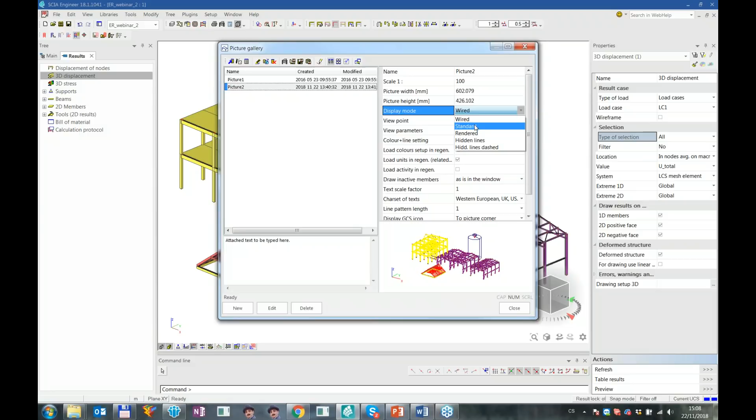I can also have different options of how difficult or how rendered I want to see my images. The easiest is wired, which is a simplified version, but I can also switch to rendered, and I have an overall rendered image. I can change viewpoints or any further view parameters that I am able to alter right in the 3D scene as well.

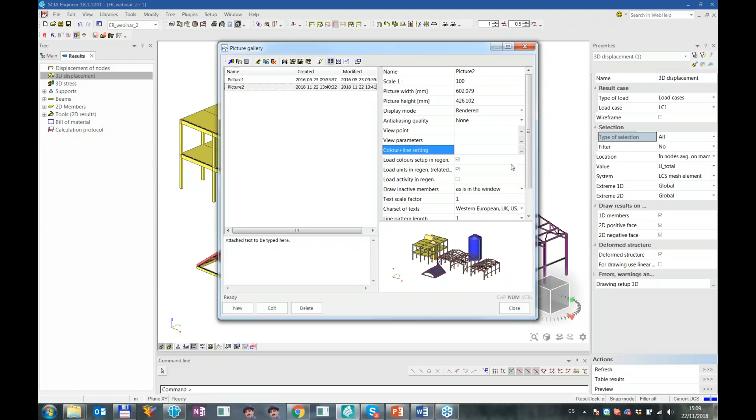And also I can change color and line settings for the entities displayed in the image separately for every picture, so not every picture has to go by the overall settings for the SCIA Engineer GUI.

I will demonstrate quickly how to work and how to be able to save pictures in files. There are multiple available types. For further notice, it's worth looking at 3D PDFs.

As mentioned before, not only 2D bitmap pages or images are available, but also support for 3D DXF and DWG format, and also some internal 3D format, which can be imported back to the engineering report. From an entirely different project, you can also import 3D vector images. I will show you how this works later on.

Here I can just write a random name and save it, and I will have the image stored in my folder. So I have it right here. I don't need this particular image, so I will delete it right now. So this is for the images. In general, you can use this on your own and try it out.

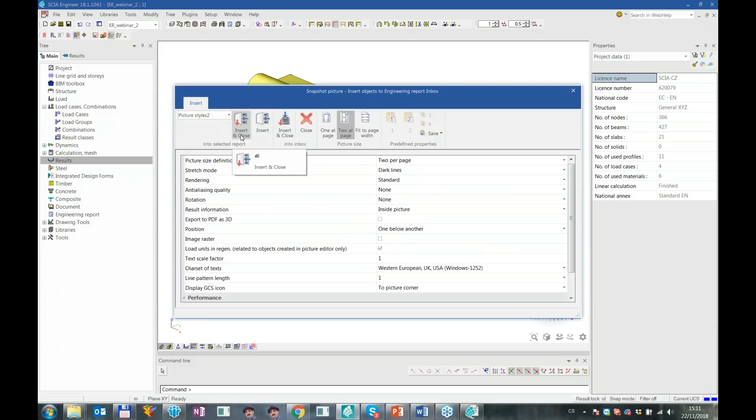If I click on the snapshot, I can again set a number of properties, and I can send this picture into the selected engineering report. I will send it to the last one because that's the one I just created. I'll do the same thing for the live picture in scale into the engineering report.

And of course, the third option, which is the live picture. I will now go to the engineering report itself to show you the properties of these pictures.

The first picture, which is just a snapshot, is and will always be a valid item. I can, for example, delete a structure here, and this is only the snapshot of a structure or even results as they were at the precise time the image was inserted into the engineering report, meaning no further changes to the report will be available in this picture. The only thing you can do with it is, since it is indeed a vector 3D image, play with the view. You can zoom in or out, and the image will behave correspondingly. So this is the behavior of the snapshot picture.

As default, I would not recommend using this one, because I believe most commonly you want to see the images change when the model is changed, by, let's say, deleting or recalculating the project.

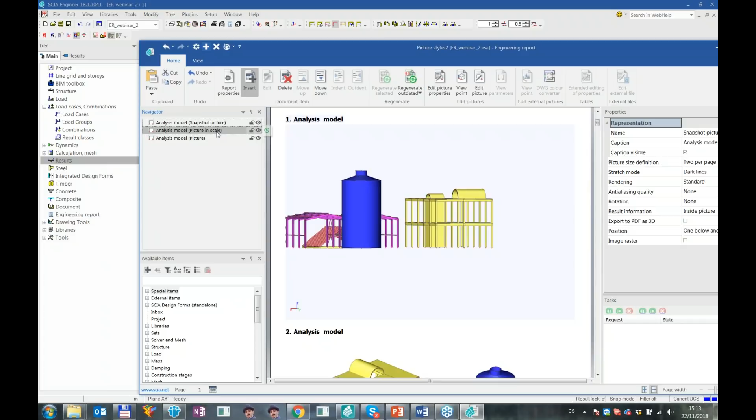The second type is picture in scale, and default live picture. These are images that have a wide range of possibilities for alteration. First, of course, it's the same for all three types: by double-clicking, you can change the view and hit OK, and the view of the image will be changed. You have further options.

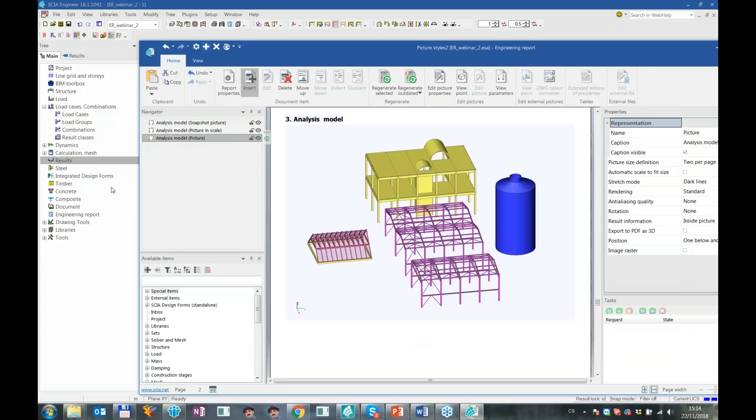Here, by the editor of picture, you can change view parameters, also viewpoint as demonstrated before, and in case this is the result picture, you can also change the type of results being displayed or the value that you display.

Let me quickly demonstrate such possibilities. Let me make here, for named selection, a 3D displacement drawing, or a different way, I can make current selection here. I can see that only for a few entities it was changed. I can insert this image into the engineering report.

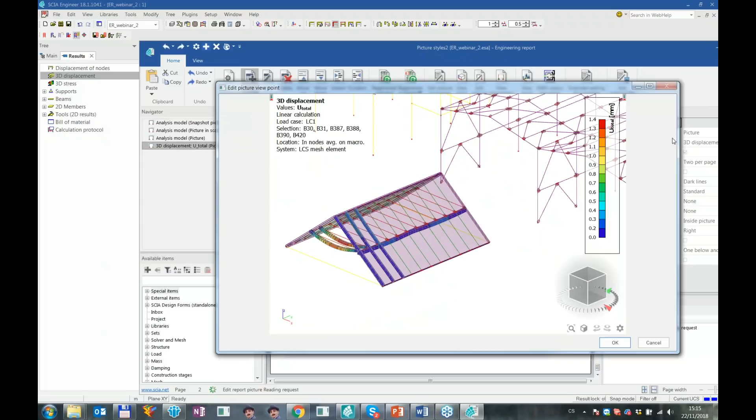And here in the editor, if I go to edit picture properties, I also can change the results here. For example, from current selection, I can go to named selection, and the picture will regenerate itself with the changed setting. The same would apply for the picture in scale.

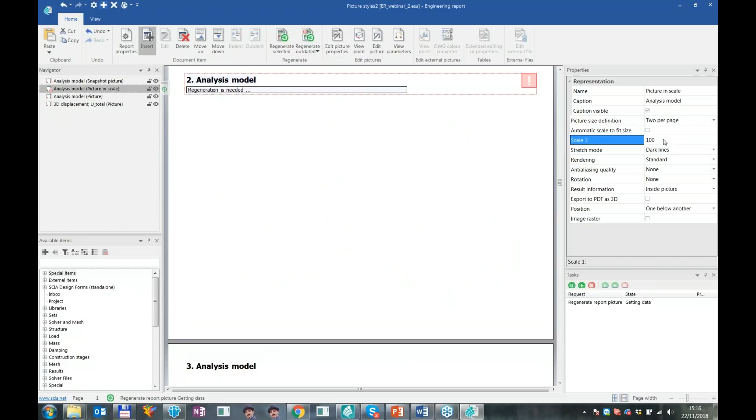The only difference here is that we have the scale factor, which behaves differently, because this would actually allow basically zooming in the picture. So by changing the scale from, let's say, 300 to 100, I get 3 times the zoom. In this case, this is also available.

This is not available directly, but I can make the exact same view, if wanted, by simply navigating in the 3D scene of the picture. So these are 3 types of pictures.

For the most common use, I would say that the live picture in engineering report is the one that you should use in order to have up-to-date and dynamically updated results in your engineering report.

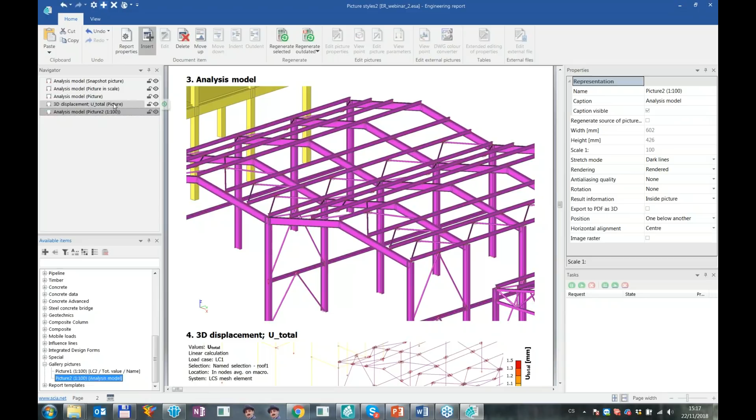I mentioned that there are 4 or 5 types of pictures, and the other one is that we are able to insert pictures stored in the gallery. In this ESA file, I have 2 pictures in the gallery, and I can insert them here as well. What you can notice is that these pictures will be inserted at their set size, as set in the picture gallery, and they will not be stretched to the size of the page. This is why I would rarely recommend using this one. Yet the possibility is here, and if you have the image size corresponding to what you want to see in the picture gallery, you can use this tool as well.

So this is for internal images in the engineering report, and I will continue with external images and using the automatic result generator in the engineering report.

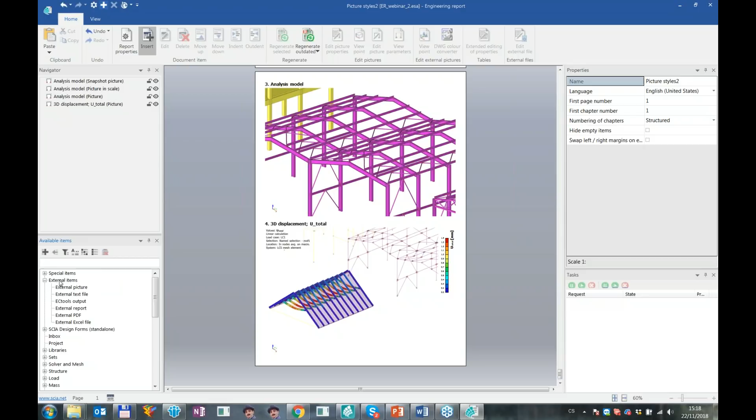For external images, in the available items for engineering report we have this external items submenu, and in this case I want to use the external picture, so I can insert it by either double clicking on the item or by clicking plus here. Currently the external picture is blank because there is no image specified to be available in the report.

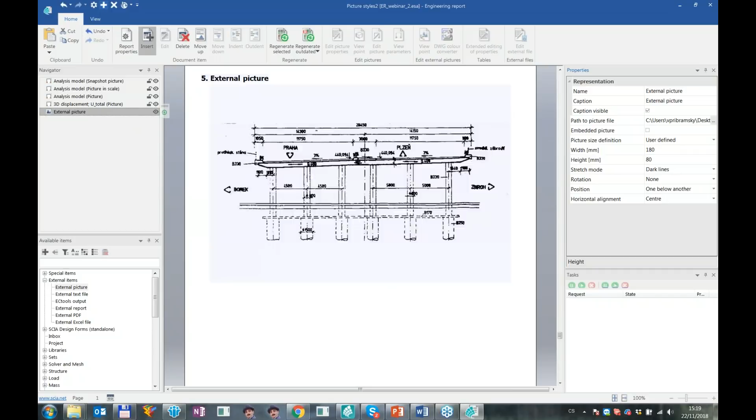There is a simple thing - we can choose a path to the external item, so I can select an image, let's say in JPEG format, and have it here in the report. I can set its size as I please, and I can also embed this picture into the engineering report.

This would mean that at this point, before I embed it, it is still linked to the picture in the folder where I have it stored right here. What I can do in this case is edit the file - let me draw a red line here - and if I save the JPEG file, the external picture item in the engineering report will become invalid.

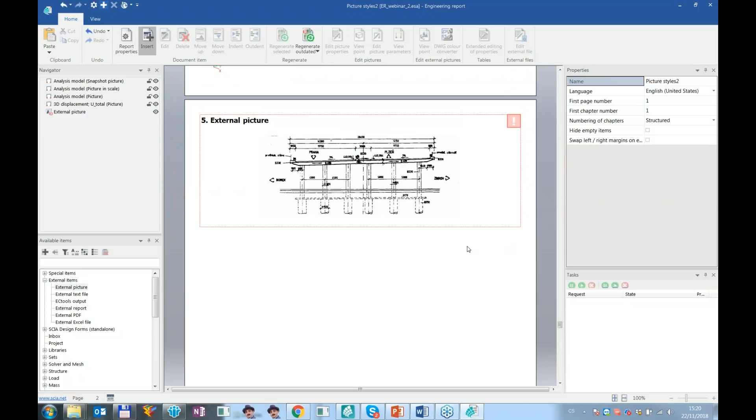This is common behavior for all external links or external items that I will speak of today - it reacts to changes in the file, and if connected to the path without the picture being embedded, it would require regeneration. So if I regenerate the image, I get whatever change was made in the image. So this is this functionality.

If I select embedded, the image will then be stored in the engineering report itself, and if I change the image now again by another drawing into it, this picture is embedded in the document, and it will look as it looked at the time when it was embedded. So external pictures behave this way.

There is more to the external picture functionality. Not only can we define its size, but also rotation - if I want, I can have the image rotated by 90, 180 or 270 degrees. And I can also set alignment. That's quite simple, but I can go further.

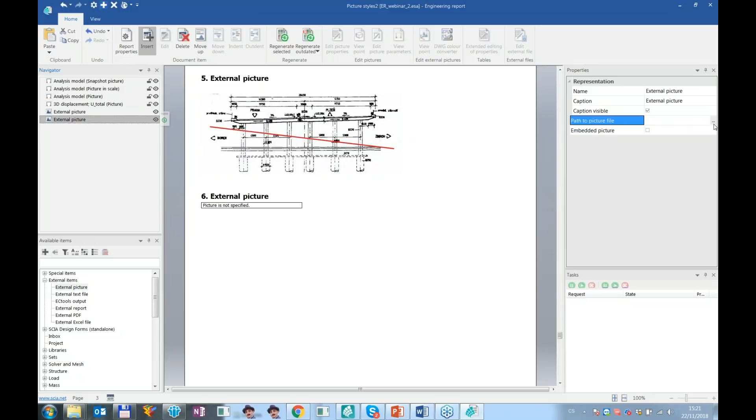I can add an additional external picture, and this external picture can be, for example, the 3D picture that I have here. It can also be with results. Let me open this one here - I prepared this one before. It's apparently from an entirely different project, and it is a 3D image.

By double clicking on it, I can change the view, and although it's saved as an image and inserted as an image, the view or its view parameters can be altered as it would in the case of an internal snapshot, or an image based on a snapshot.

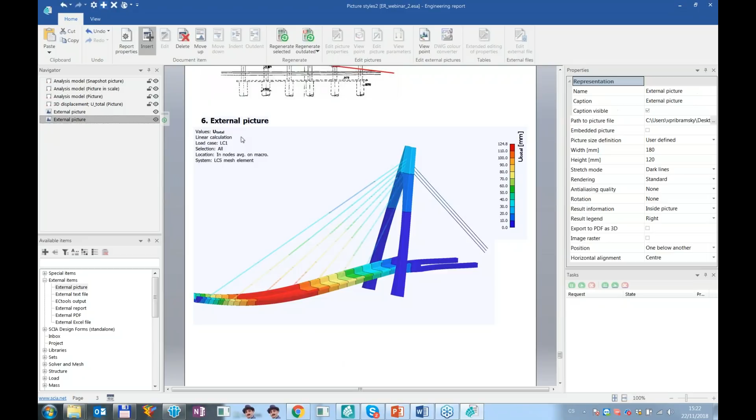There is also - these are still images - I can include a drawing in DXF. I have here a DXF file that is stored in my prepared folder, and here I can see the content of the DXF file. Here, of course, I can see everything that is in the file.

If I double click, I can, for example, select only part of the image, and have it here directly connected to the DXF drawing. The main benefit of this is that if the DXF file is saved anew with some changes, the images will become invalid with a red exclamation mark in their top right corner, and after regenerating them in the engineering report, they will contain the most current version of the DXF.

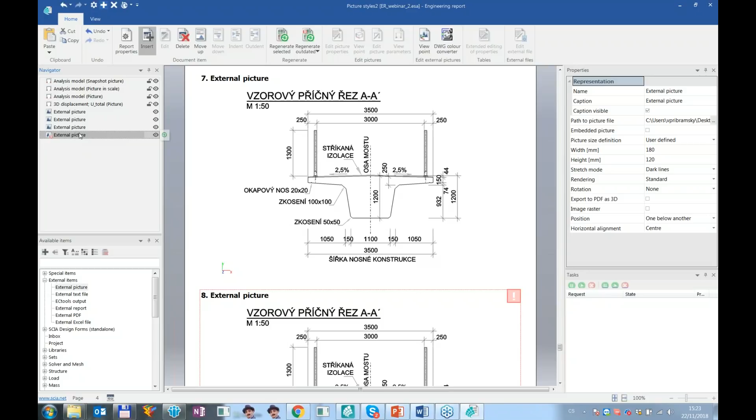I can also, just by means of Ctrl+C and Ctrl+V, copy this external image or any other item in the engineering report, and I can make an entirely different view. Let's say that I want the plan and the longitudinal section here as well. For this, I would like to have it rotated to better fit the size of the image.

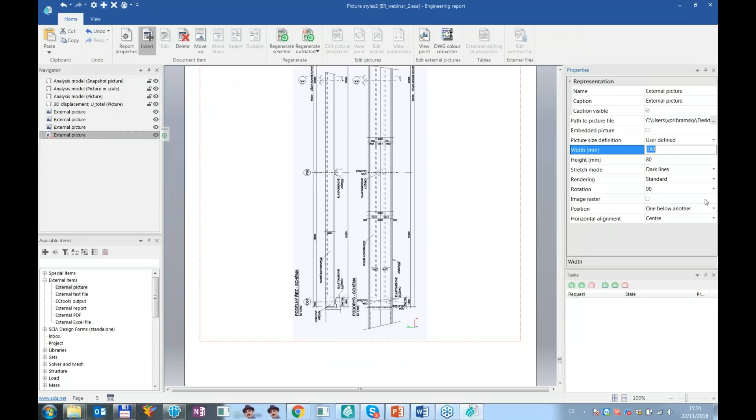Let me zoom some more, and by this I can insert the image right here, and I can change its size as I would like to. So now I have it quite zoomed, and I can continue with other parts of the report.

Again, this is live link to the DXF. You can see that the reference marks and texts are supported, and also the dimensions.

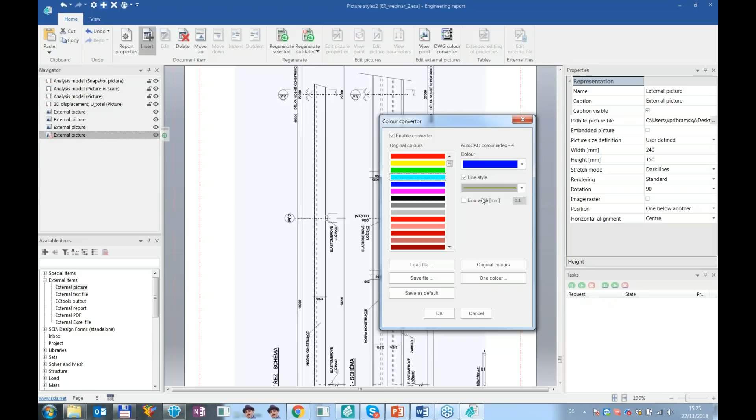One thing that is particular for DXF format is the DXF color converter, because ordinarily in DXF you use different colors for different layers, and these different layers may correspond to different thicknesses of certain lines. In this case, I can say that the cyan color here is transferred to blue, or transferred to blue, and I can also set a different line style or line width. If I hit OK, it gets regenerated, and whatever was in that color I set in the engineering report, mostly connected to having it in different layers, gets drawn in the specific color and style of my choosing.

So this is for the DXF. Again, DXF files can be embedded into the engineering report, meaning that they will be available for the whole time, even if the DXF they originate from is no longer valid or is even deleted, and these embedded items will remain in the engineering report.

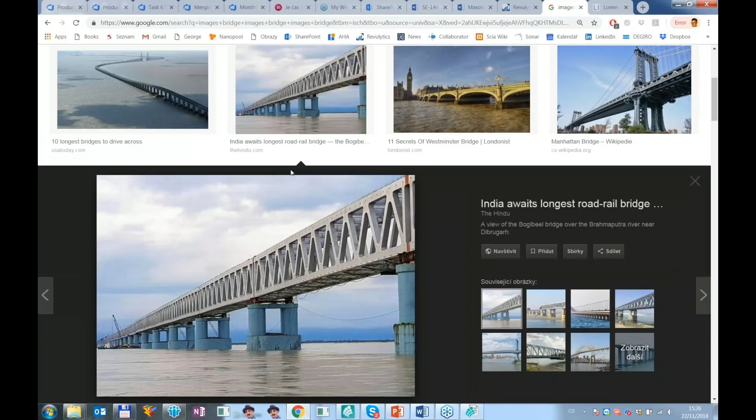Further functionality regarding external pictures is that you can paste external pictures right from any source. Let's say that I have an image gallery on Google. I can just copy an image, now it's in my clipboard. Here I click Ctrl+V, and I have the image right in the engineering report. So this is very simple for inputting of images.

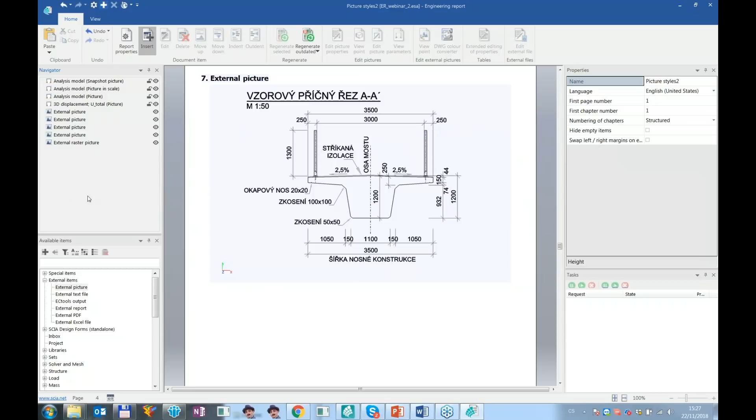I can also use print screen capabilities. I can make, for example, a print screen at this very point, draw anything into my image, cut it, and again this very image can be inputted inside the report as an external image.

So regarding images, I think I've covered a lot at this point. Let me delete most of the things I inputted here and continue with automatic generation of results images. For generation of results images, we need to have a plain structural image in the engineering report, so let me insert a live image into the engineering report as I have it here.

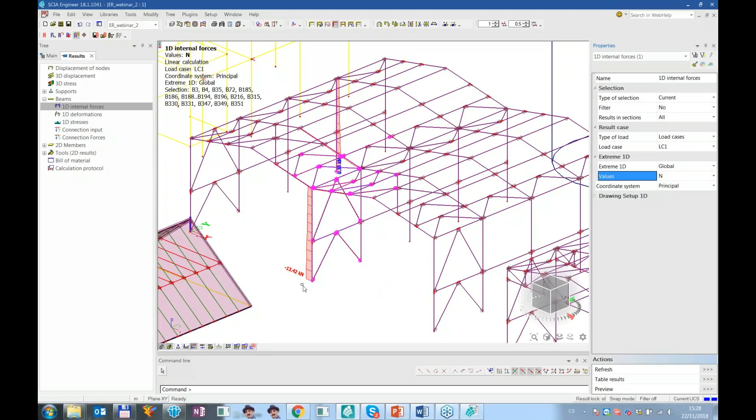Then I can go to results and, for example, ask for internal forces on beams. Here I will make a smaller selection in order to have it quicker. Of course, for other or all projects, it can be done for the whole project, or sorted by different filters or layers.

In this case, I will use an advanced selection, a named selection I've prepared for the roof here. So here I can see that I have results only for the roof. Into the engineering report, I can send the data currently available, and those are the results. So I send the table into the engineering report, say insert and close, and in the engineering report this table of results that I've seen in the 3D scene is available.

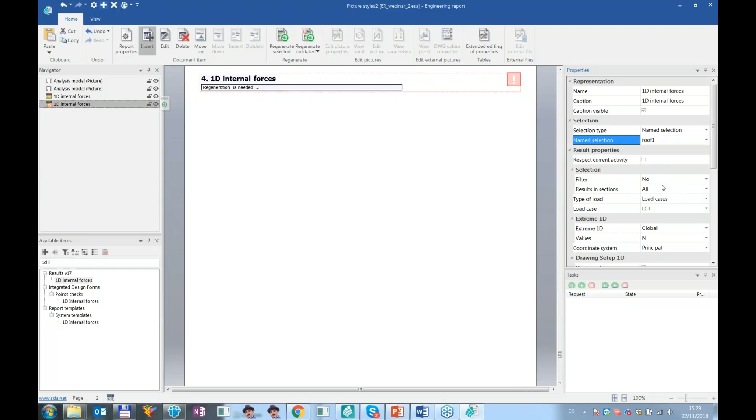I can also do the same thing entirely from the engineering report. Again, important to note, if you search for an item in this available items list, you can just write and it will get sorted for you. So I can insert the same table here by hitting selection, again the named selection I set for the roof, and if I go for regenerate, I have exactly the same table.

Now I would like to see these internal forces in this image, and I would probably like to generate more images at the same time. Let me first make this image a bit smaller. You can do it by simply selecting in its properties user-defined size, and here I would like to see it a bit less high than before. And for automatically generating results images, I go for result picture generator.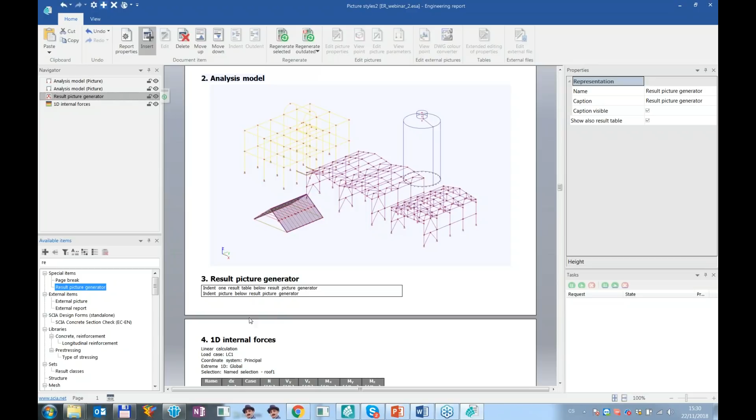So I write RE, and I can input the result picture generator into my report. Here I have a help that I need to insert a result table, which I have right here, and I have to indent an image in the generator. I just indent by clicking and dragging the item under the result picture generator, or alternatively you can use the indent button here. It has basically the same effect, and I can indent both items.

The result picture generator will then, based on the result table, determine what values, in this case internal forces on beams, are available, and I can quickly select several items here. I can also, in the case of the table, still change the load case or other properties, or even the selection of the results.

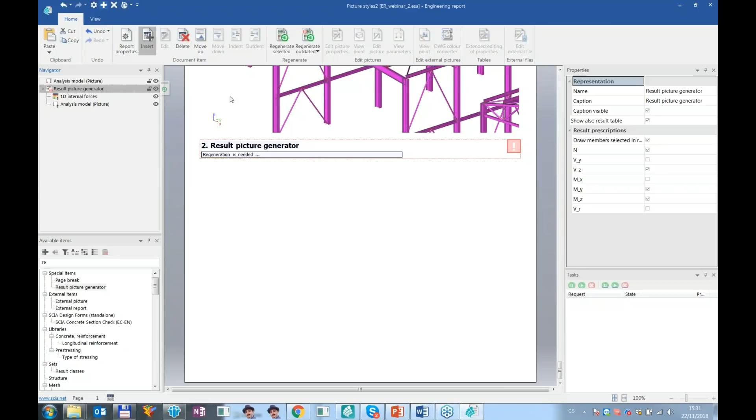Now if I regenerate, it will be quite fast. I can see the result picture generator created a table of results, and also took the picture I inputted, and it draws the internal forces on it so I can see the normal force as I selected, the shear force, and also bending moments in My and Mz direction.

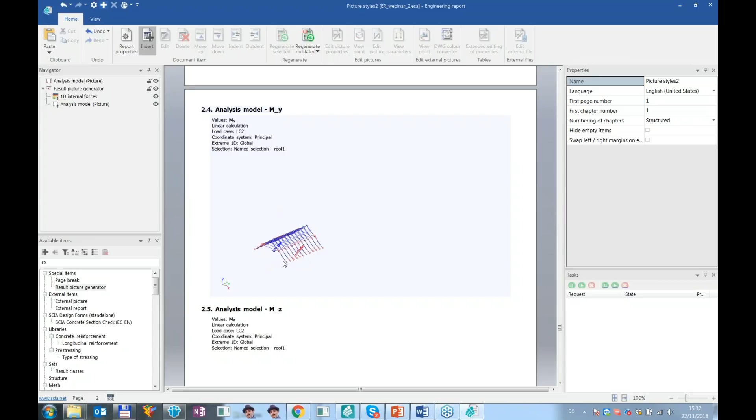I can see also that this picture was zoomed out in terms of the structure that I have in my selection. So again, I can double click to zoom into the structure that I have in the selection, and after regeneration I will be able to see zoomed results images as I asked in the 3D view.

So this can be used for basically any results, 2D or otherwise, and you can change it by only inputting a single image, meaning that all your images will look the same from the same view with the same setting. So that's the benefit here.

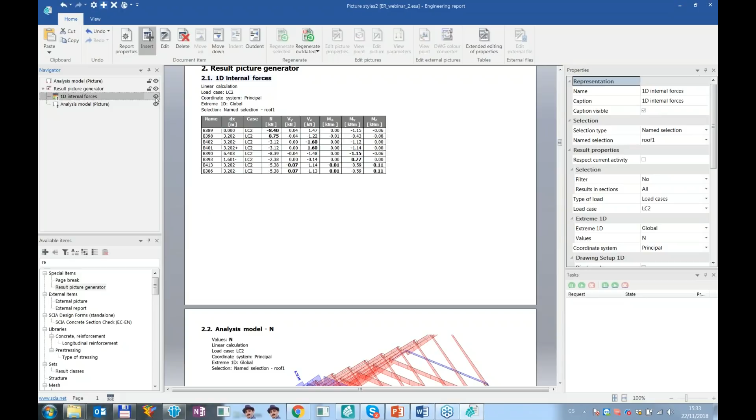If I wanted only to see the images and not the table, and this is also a general function, I can hide it in the document by clicking the eye icon. And here I can see that the result picture generator only generated and is showing the images themselves.

Also, these images in the current version contain what we call results info. This is basically an item in the picture that states the basic settings of the results, so you can really see what load case and what values are drawn in the images.

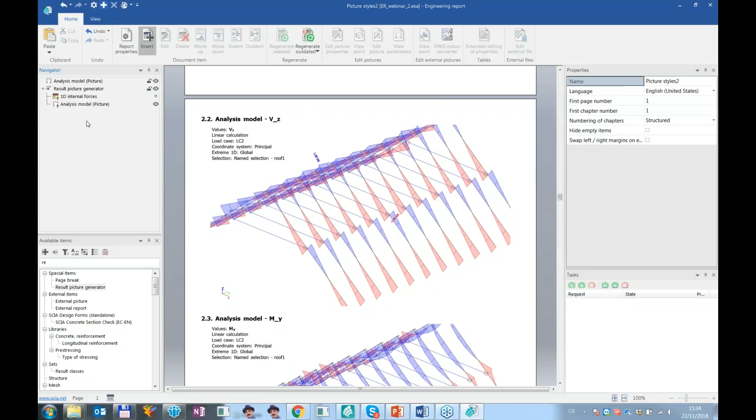Similar to the result picture generator is the functionality of indenting images under specific items. Not every user is aware of this functionality, so I will demonstrate with two different cases that this is very recommended to use.

Here I have multiple load cases, and I want to see my loads in the result in the engineering report. So what I can do is simply add this picture in the engineering report. The second thing I will do is send a nice rendered image in the engineering report as well, in exactly the same way. And these two images are now available here.

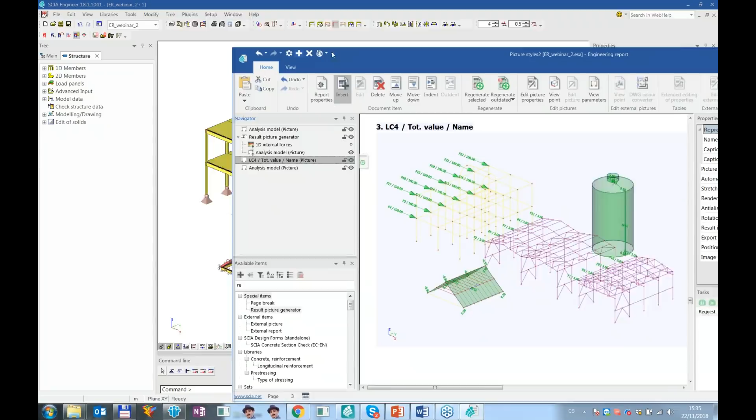I can now automatically generate this exact same image for every load case by finding load cases here, inserting it in the engineering report, and indenting by drag and drop the image under the load case. This will cause, after regeneration, that for every load case I have in the list, I will get the resulting picture.

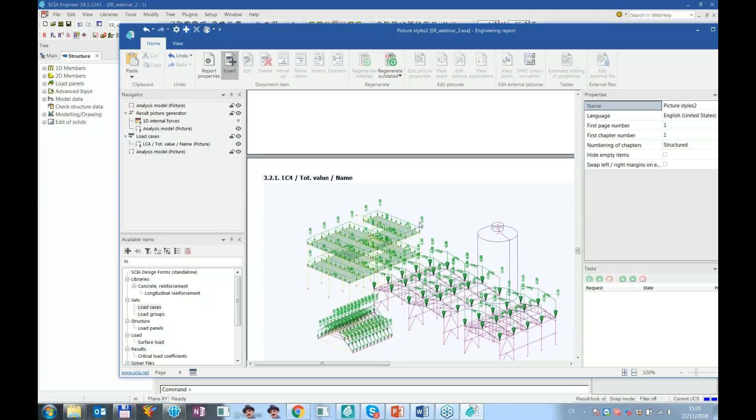In this case, the first picture is blank because it's self-weight, but the second picture contains dead load, and the third picture contains live load, and I also have another picture which was the actual image that I inserted. The main benefit of this is that all the images are consistent in how they look, and I can edit all of them at the same time by editing only a single picture.

If I so wish, I can also add tables as indented items under the load cases. So I can add, for example, point force or surface load, and it will generate a special table for every available load case that I have in the selection.

If I don't want to see the self-weight load case here because it's basically empty, it doesn't contain any drawn loads nor any point force or surface loads, I can do that by not selecting all load cases, but instead selecting specific ones—let's say only load case 2 and 3 in this case.

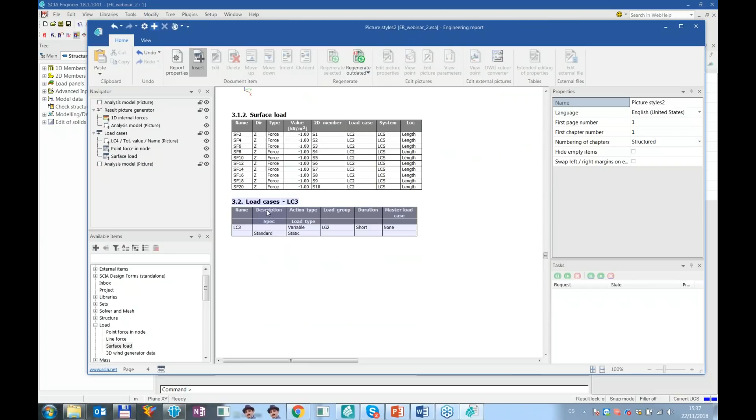If I regenerate my document, I will see that load case 2 is generated, along with its corresponding table and surface force, and the same for the other load case.

You can see that the picture here is named by load case, for example LC4. This just means it was the default name of the image, so it's better to rename it.

Let's say 'load visualization.' Now when regenerated, we have the name of the chapter available, and we can see that the visualization is under it, corresponding to what we have there.

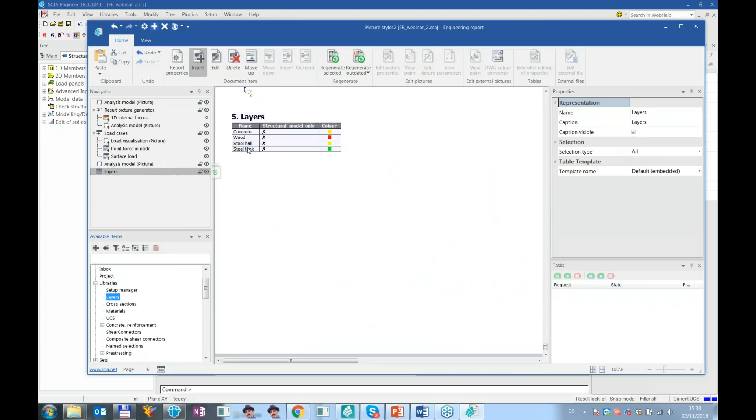The same can be done with rendered images. Let me go to libraries and insert, for example, a group of layers that I have, defined based on material in this case.

But you can also, and most commonly, use layers based on the height of the floor or other items. I can again drag and drop this image.

If I drag and drop without holding any key, it gets indented. If I also hold Control, it gets copied under the layers item.

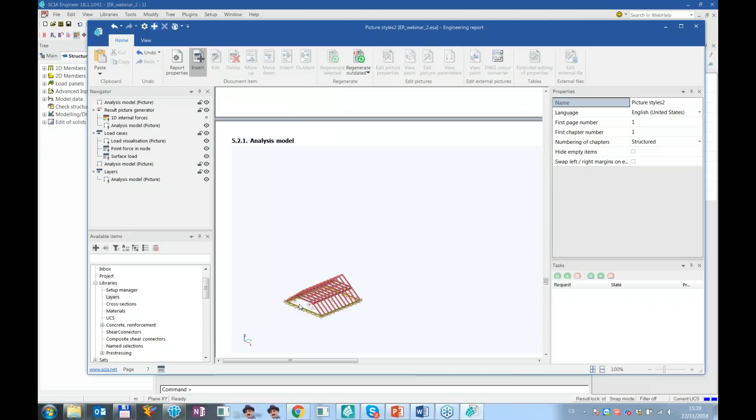And if I run regeneration, for every layer that I selected, I will have a special image with the content that it contains.

I can see here again that the images are quite big in terms of blank space. In this case, I can use a feature called automatic scale.

This feature will look at whatever is in the image and basically cut out the blank areas. So the view on the image won't be the same, because here I can see a zoomed concrete building.

And here I can see a zoomed wood or timber structure, and in this case also the steel halls.

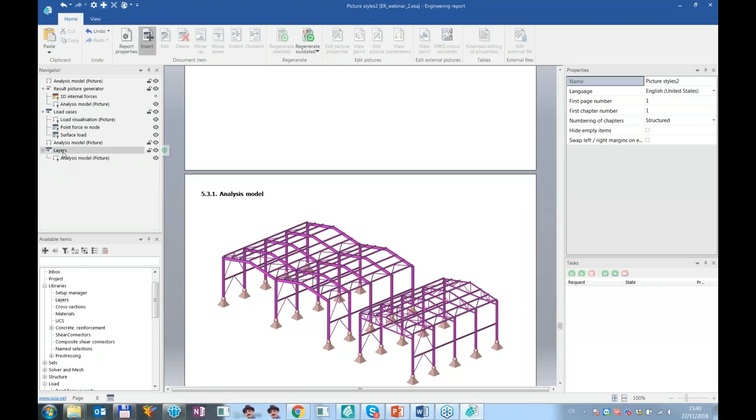Let me exit this particular report and continue with further explanation of external items.

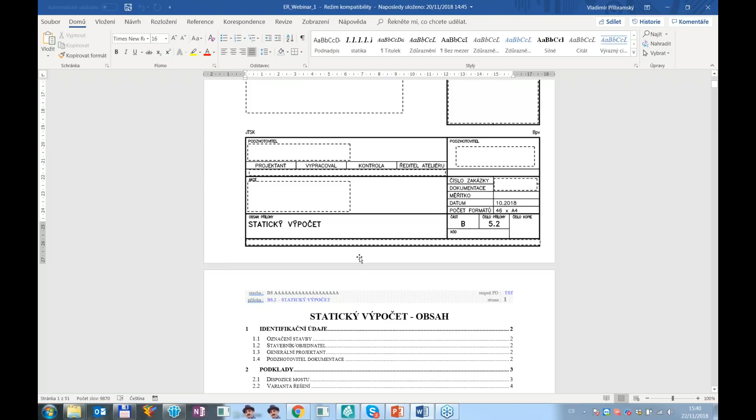For this, I have prepared a well-anonymized structure document which represents a somewhat simplified but realistic structure, and a document that was really used as a structural export.

There are some items available here, and I will show you in the next 15 minutes or so how to cover all the items I have in this document by means of the engineering report.

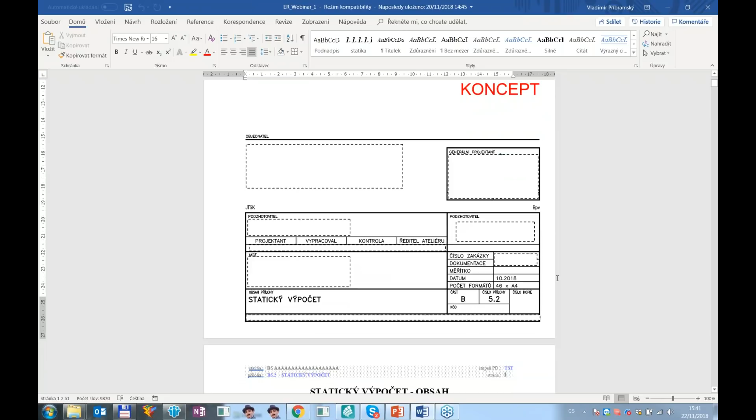So the first thing is that I have here a cover page which contains identification of the building or structure and names of the responsible people.

We also have a special item, the table of contents, and of course we have the header and footer.

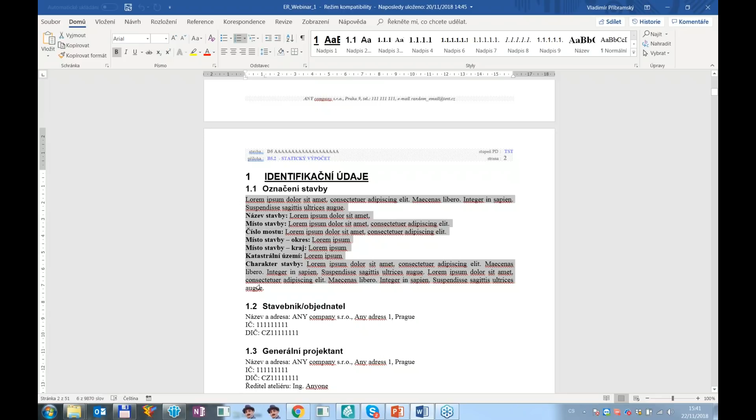Then we have some chapters, some texts that are of course available in this document, and we have images, which we've already talked about.

If you have an image from here, I can just click Ctrl+C and Ctrl+V in the report. So this is quite covered, I believe.

We have some more texts. Now we have combined texts with live images from the report, so this is also something that I will speak about.

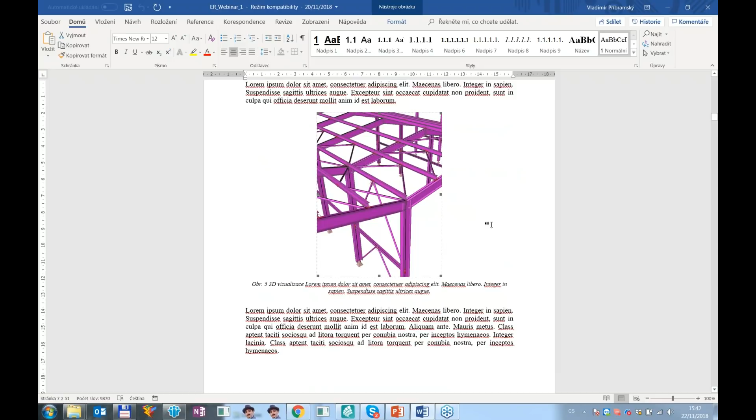We can also have images not only as a single image on a page width, but also two or multiple images on a page width. This is present as standard output from the report in the structure document.

Then we have some tables with load specification, which are copied from Excel. Further on, I will switch to the very end here.

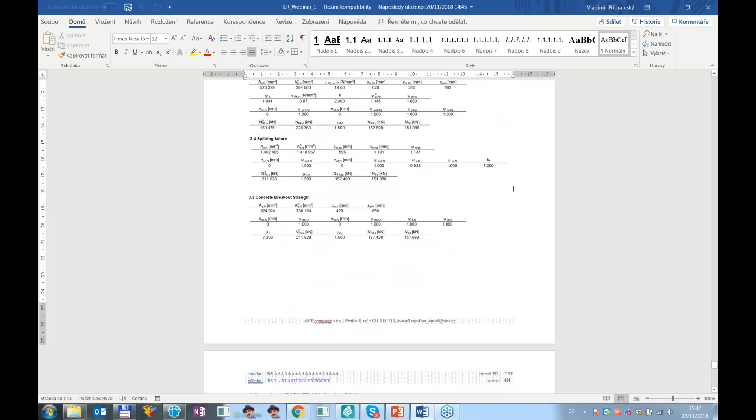And then we can also have entirely external checks. In this case, it can be an anchorage check from Hilti, which has a standard export in PDF, copied as a snapshot into the report.

Additionally, if you use your own checks, in this case here are inserted checks of handmade concrete design, which is very simplified for simplified use.

I will also show you how you can input live Excel sheets into the engineering report, as it is possible using an OLE object in Word.

So let's get to it. If I open the engineering report, I will again start a new one.

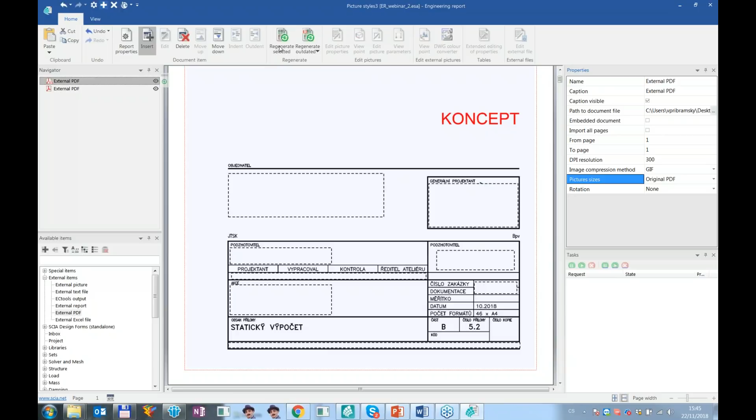What I can do is say I want the original PDF, and after regeneration I can see it on the second page, because I have here the name of the item, which I can hide by saying I don't want the caption to be visible. Now I have this first cover page right in the engineering report, stretched throughout the whole page width.

The second external PDF I will get to later.

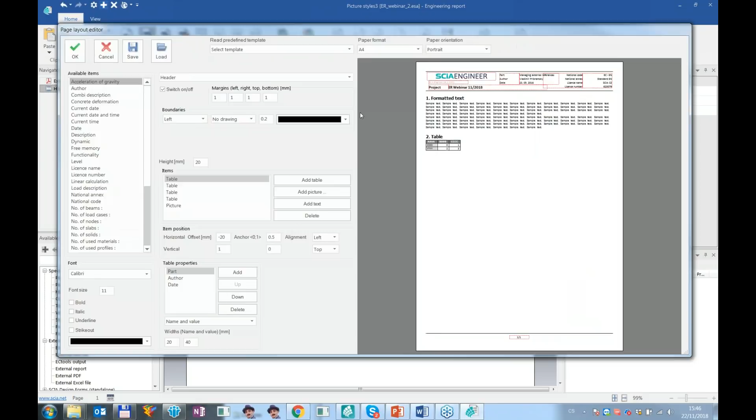Let's continue with special items - header and footer, to be specific. Header and footer is defined from the page it's inputted in, and in general settings we have quite a lot of information stored in here, the sole reason being so you can see all the capabilities.

I can zoom here in the preview window by hitting Ctrl and scrolling my mouse wheel, and I can see there is a lot of information. In my document here there is not much available - basically this is all just text, and the only dynamic function here is the page number that Word allows us to use.

In engineering report, or in a header in engineering report, we have a bit more complex approach that allows you to import any of these available items that are dynamically linked to whatever is in your project, starting with the project name, author and date, settings of national annexes, or even license name and license number in the header.

Also, you can have images inserted here as an external item. Of course this is quite a robust solution, which isn't always necessary. You can select all that you want here to be present in the header, or use as little as you please.

The header is combined out of tables, as we can see here, or separate pictures or text fields. Each table is composed of separate properties that can be deleted or added, and each table can have a different position.

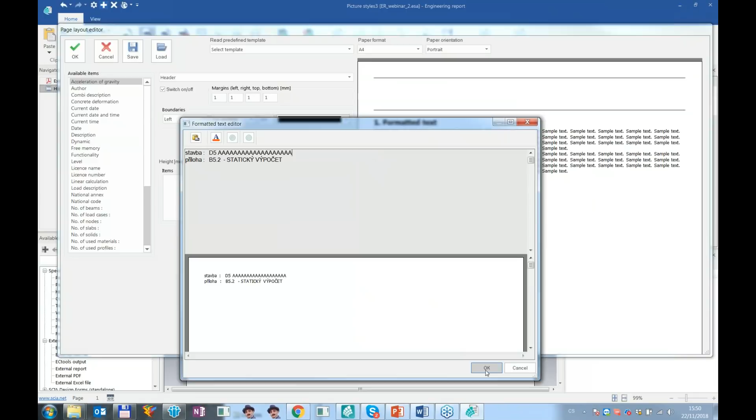I have the text inputted right here. Of course, the text has width properties, and since I have longer text here, I extended this, setting it to 150. I wanted to have it anchored on the left, but I see I inputted an extra blank line by mistake, so I go to the editor and delete that empty line. Now it looks like this.

I can do the same for the right side, adding another text copied from here. I want this to be as I have it here. The page number I'd like to make dynamic, since I have different page numbers for different positions. I hit OK, and I anchor this field on the right side, also aligned to the right.

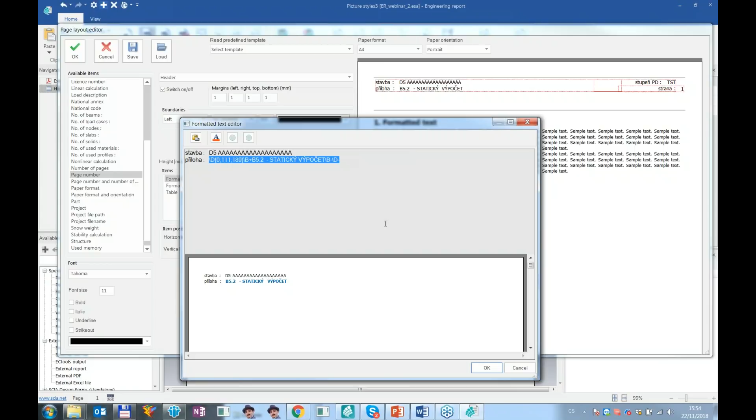Now my header is clean. I can also do one more thing I have here in my Word document: I want this part of the text to be blue and bold. I can do that in the editor by making it bold and blue, and I have a direct preview so I can do it like this. I can also see my header is quite wide, so I change its height to a reasonable value, and put this boundary away, setting the top to nothing. Now it looks very similar to what I have.

Let me continue with the footer. I won't go into much detail because the footer uses basically the same settings as the header, and it's very simple. Here in the footer, for example, I only have text, so I'll add text, and that's the only field I need. Let me hit OK, and now my footer is as I wanted.

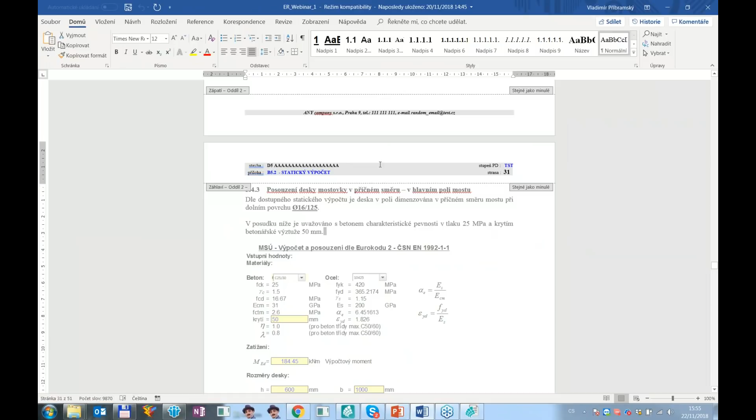Further, I'd like to talk about styles, which is another special item here. I can set exactly the same styles as I can in Word itself. You can see that in Word I have preset styles for simple items, and I can do the same here.

I can select a style, and by editing it choose from default embedded templates, or define my own entirely by setting each item, or chapter level. I can make them bigger if I want, and this will be applied for the rest of the document since the style is inherited. So let me select a template instead.

Let's select a green template and hit OK to see how it behaves. Let's input two identical tables. If I move this one up, I can see that this load case is above the style setting, so it has the default style, while the other one has the style I defined. Most commonly, you'd put the style definition right on top of the report. That covers header and styles.

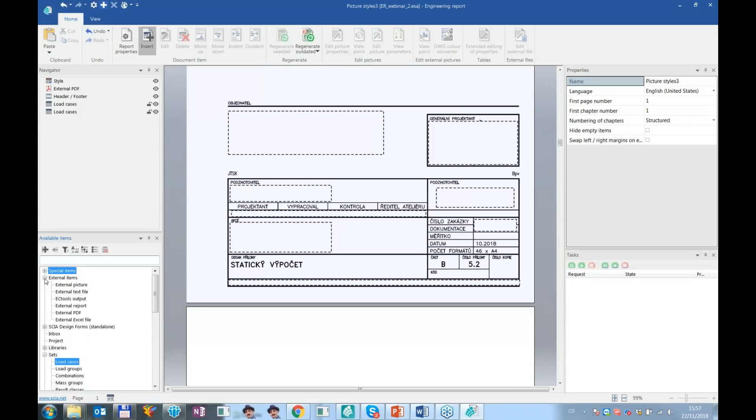Let me add external PDFs here, and again browse for a file. I have here the external check for the Hilti anchor, and I can see that the entire PDF is just inputted as it is. Again, if I update the PDF with a new version, it can be regenerated, and the new version of the PDF will be added.

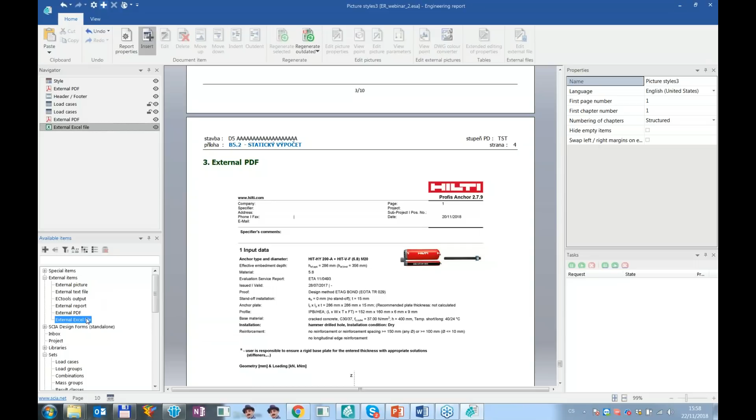Regarding Excel files or Excel sheets, we have the possibility of adding a live link to Excel right here. So let me add one. I prepared an Excel sheet for this webinar, so let me insert it into the engineering report.

Now let's wait for the regeneration, because the Excel file contains a number of sheets, and as set as general, it will just import the whole spreadsheet as it's set. We can hit edit here or double click the item to be able to work with this further.

So here I have single worksheets that are available in the Excel file, and you can see that the default setting is that all used cells are presented. In this case, that's not very lovely, because I want, for example, to have them sorted by pages. So let me at this point delete all presentations, and for instance, I have set my loads. As you can see here, I've set the printable area and also set it with the page breaks.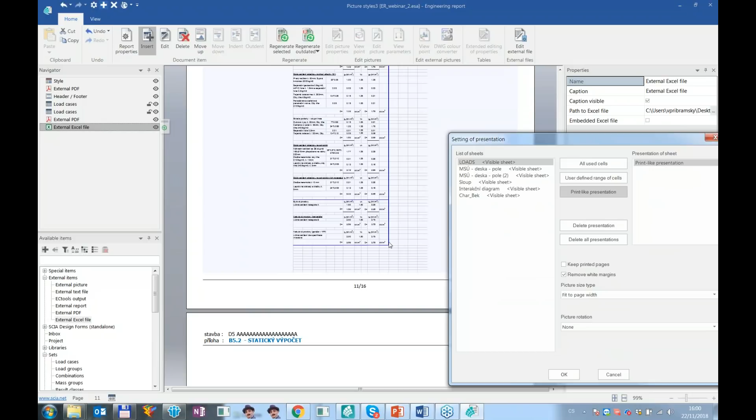So here I transferred my Excel sheets for this feature to use a print-like presentation, which is basically the same that would happen if you print your Excel file with the printing settings and end of lines. And I want to fit it into the page.

I can select different sizes. Let's go for user defined, and I want it to have a width of 150 millimeters. So let's hit OK here.

After quick regeneration, I can see that in this case, it's the specification of loading. I have it separated by pages that I defined in the Excel. Again, this is the live link, meaning that if I change anything in the concrete table, the external Excel file will be invalidated, and I will have to refresh it in order to have it up to date again.

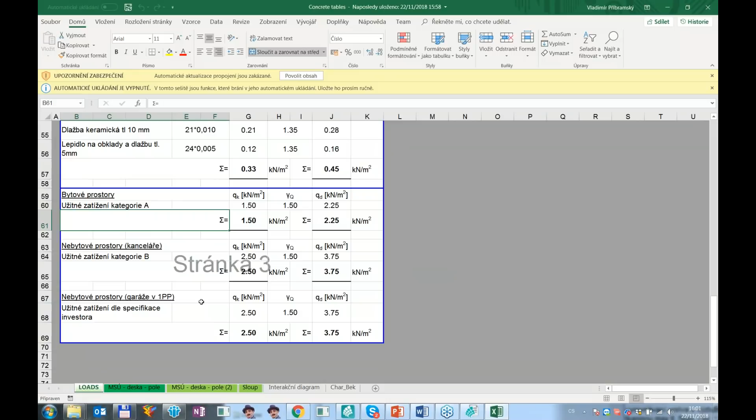What I can also do, but that's something that is basically print screening, and that is one more remark for external pictures, is I can make a selection of the check that I have here. I can hit Ctrl+C or copy it.

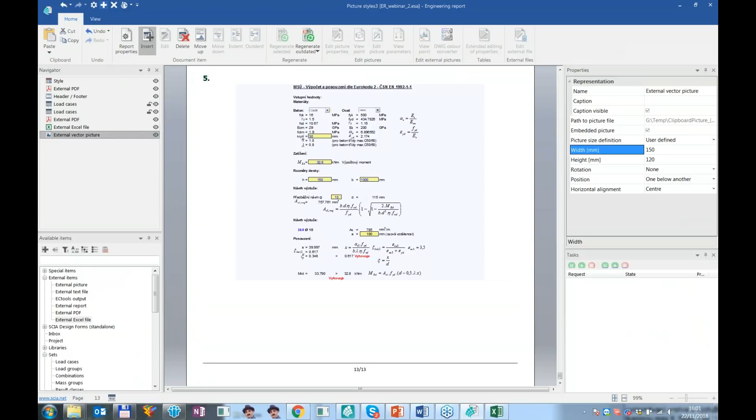So now it's in my clipboard. If I go now into the engineering report, I can just hit Ctrl+V and it is automatically included as an image. So I can now set width and height, and I have this check as a picture in my report. So either use the live Excel link, or this only for occasional use.

Further, as I mentioned, or as you often use in the structure report, we have support for external text files, meaning that you can just input an external text file, and by double clicking on it, or you can select a text file that is full of some text which will be translated as chapters. I don't think this is too useful, so let's

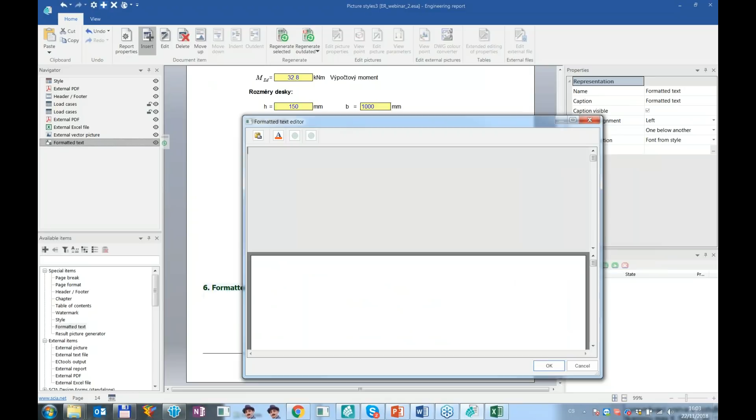continue with the formatted text, which is a special item that allows you in general to write text directly in the engineering report. By double clicking on it, you can write whatever you want, or you can insert blocks of text from whatever source. Let me just Ctrl+C some text here. I can put it here. I hit OK, and I have a text chapter here available in the report.

If I double click it, I can edit the text as I would in Word. Furthermore, if you have this text in the clipboard, as I do now because I hit Ctrl+C in the browser, I can just hit Ctrl+V or paste it as text right away. So text is recognized as text, same as the Excel in the clipboard was recognized as an image, because we can't import or include Excel in this manner. But you can input text just by clicking Ctrl+V, and that's basically it.

So you can compose your structure document also with text very easily, or not as difficult as you might have thought it would be.

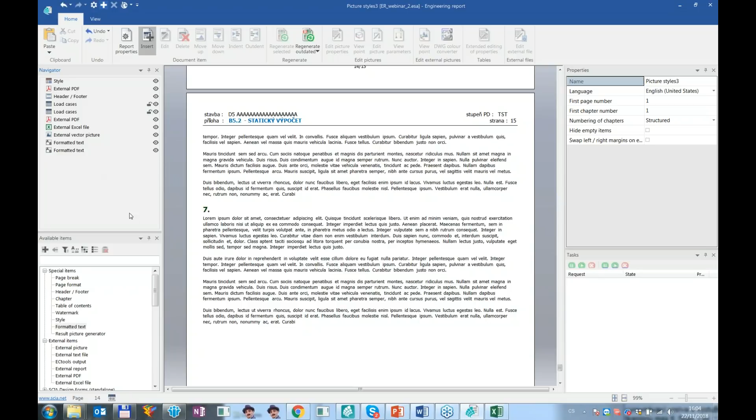Additional chapter that I would cover, as we are now reaching the end, is the table of content. Table of content is no big difference. It works basically as you would expect, but there is a last very important part.

You can make a live link between reports, because in this case I have a very simple report, but if you have hundreds of pages of free reports, it is often prudent to divide it into several specific reports, as I have here. I have a report for structure, some results for loading, and also loads and results in another document.

What I can do in every single document that I have prepared, like here, is go for the report navigator, and export this document or this engineering report as a report. So I do that, and let me name it like ER 1, never mind.

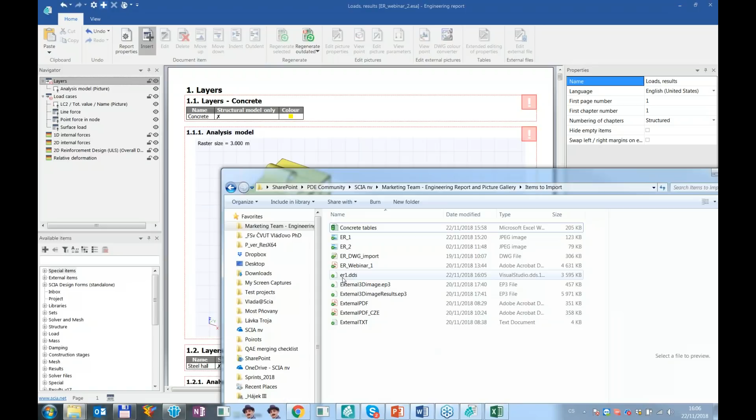Now the report is available in the folder that I placed it in. I see it right here in the DDS format.

What I can further do is link this report to have it automatically updated when the report is externally regenerated, let's say after the calculation. So I can set here, external report, and use this one. I have a different one there. This would do that when it's updated, it will update the template itself.

The main usage for this is that I can go into my very simple report and add, in this case, 3 external reports that I've prepared for this. First would be the structure, second would be load results, and the third would be, let's say, 3D displacement. And I can see that now I have all 3 reports that I've prepared in this very same engineering report all together.

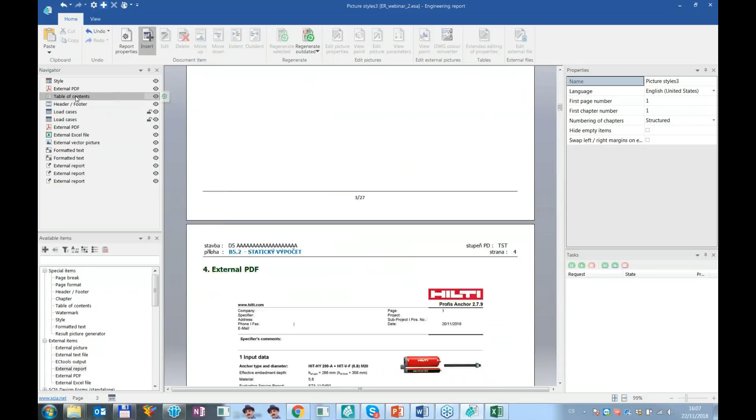Benefit of this would be that I have the header, style settings, and also I have the table of content, which is then composed from everything that was contained in all of these reports.

If I shall now go, let's say, for the structure, which is one of the reports that I've included, and here let's include one additional image. Let me regenerate the report. I can close it now, and I have to regenerate it here.

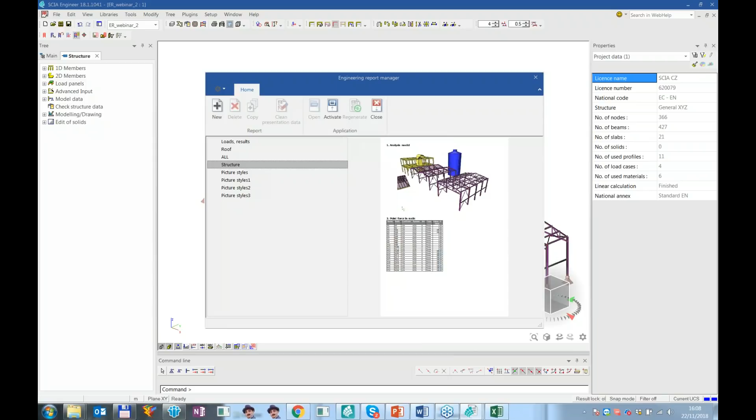This regeneration actually creates the updated report, and here in my main report, when this thing is done, I should have the report invalidated because of the change. I'm not sure if I selected the right one, but by this means the report will be changed. Oh, it's the structure, but yeah, sorry, let me try a different one.

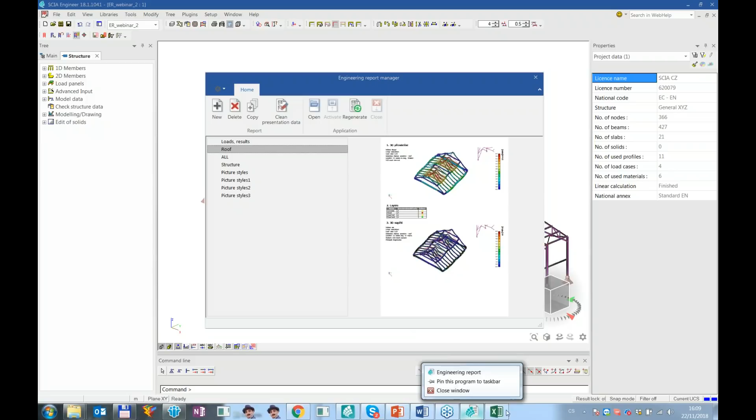So I regenerate this one because that's the one that I updated. After a short regeneration, I should be able to see the content, and it should also regenerate the item in the external file, which would lead to me having in this report the overall content of everything that I've prepared in separate reports.

In this report, let's call it final, I can export after external regeneration to PDF. I can also select the path to this PDF.

Currently with this setting, and this would be the last thing I will share with you: if I, for example, run analysis together with engineering report regeneration, this would cause all the engineering reports to get regenerated. They will also get updated into the main report, and when this is all done, the main report would be saved as PDF right in the folder where you set the PDF export should appear.

So this is basically the workflow. I think I should conclude this webinar session.

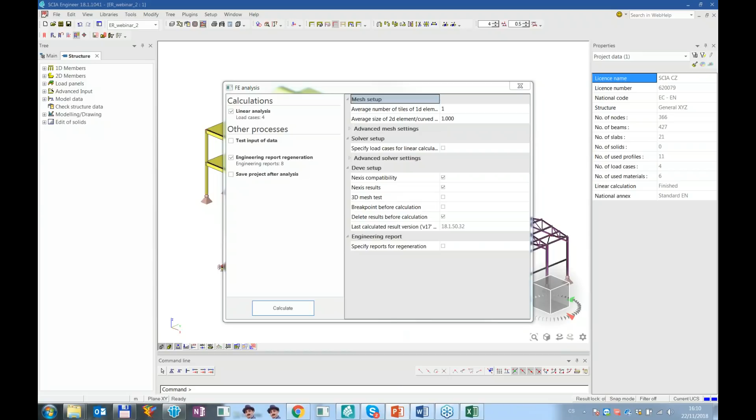I've talked about the images, the types of images that we have in engineering report. We also covered some internal engineering report functionality, such as header and footer, styles, and indent capabilities and result picture generator. And also we've covered external images, PDFs, Excel sheets, and the utilization of external reports, which would allow you to divide reports into multiple while having them still at one place.

This would be helpful. One more use case would be if 2 different structural engineers work on the same report - say one steel engineer, one concrete engineer - they might be able to work with the same ESA file and each have their own report, which might then be combined automatically in Engineering Report by its own internal capabilities.